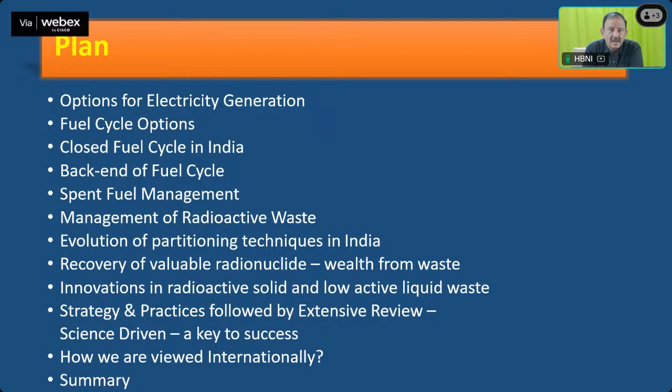I will rush through to give significance to the fact that nowadays global warming has gone beyond the table of a typical scientist. Earlier, for the last 20-30 years, the scientific community worldwide kept working and trying to publish. But now things have gone from the scientific community to policymakers, because there has been a visible change with respect to global warming.

This slide shows per person consumption of electricity. The world average is around 3000 kilowatt hours per unit, and in the Indian context we still have a big gap to cross even to come near the world average. Presently we are at around 1255 kilowatt hours consumption per person in India, and that too is not representative, because there are still almost 205 million people where electricity has yet to reach. Similarly, worldwide, 9% of the world population, amounting to 940 million as per United Nations data, still need to see electricity.

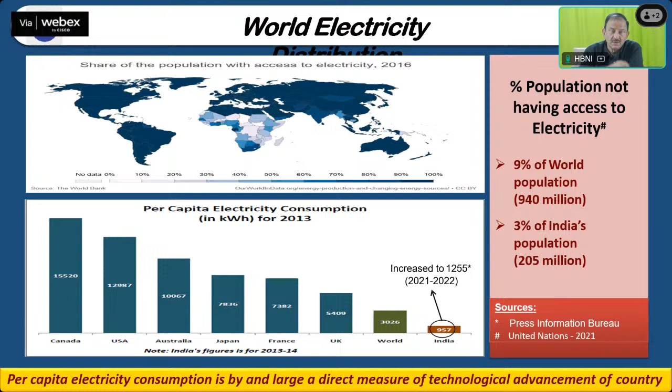World average is around 3000, and advanced countries are touching around 12,000 for US, and even Japan and others around 8,000. So there's a big gap, and this big gap needs to be bridged.

We are all aware that nowadays the government of India is trying to put a lot of effort and focus attention on the renewable part, for the simple reason of trying to reduce carbon signatures. And if you might have seen, in December, our Honorable Prime Minister Modi ji visited what is called COP, the Conference of Parties.

That was the 28th meeting, held in Dubai, where India has reiterated that by 2070 we have to achieve zero carbon signature. That means more stress needs to be given to a process which can meet the demand of electricity without emission of any carbon.

From that point of view, solar has been given good attention, but we are all aware of the limitations of solar. It may not be easy to meet the baseline voltage of the grid. At the same time, a huge amount of toxic waste will be coming, as solar panels need to be replaced more frequently over time, generating a large volume of waste that is chemically toxic.

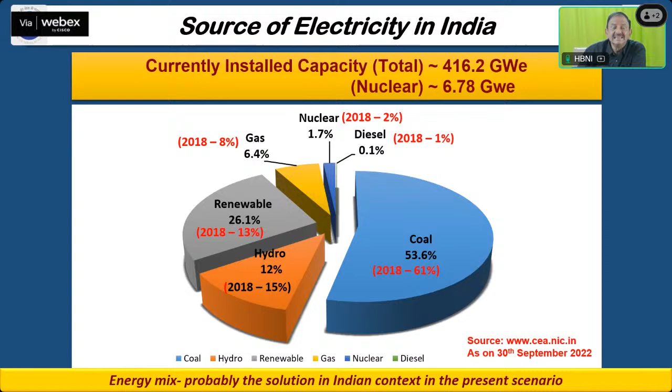It is really very surprising to see that 99% component of the air is not at all contributing anything with respect to global warming.

CO2, we know, whenever IR radiation comes, which is the molecular fraction generating heat - N2 and O2, which are the major fraction of air, do not absorb IR. For IR to be absorbed, there has to be a change in dipole moment. So it is CO2, maybe methane, and then NOx, but it is CO2 which is present in large amount, and it absorbs IR radiation.

This happens while the IR radiation is getting shined to the earth, and even after reflection from earth going back, it is again being absorbed by CO2, which in turn makes the earth warmer, and all of us are aware about the consequences of this.

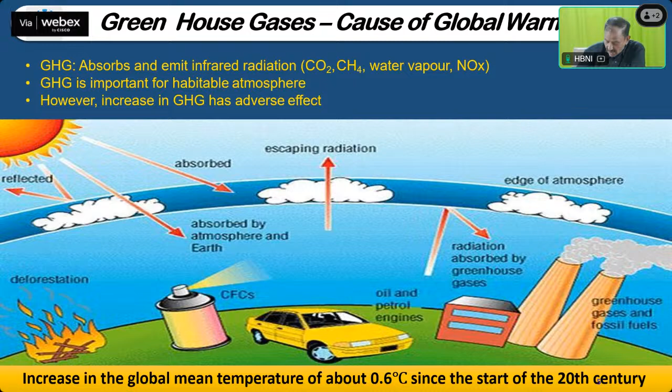So now indications of global warming are more than visible. We have seen abrupt changes in the environment - melting of ice, glaciers and all, increasing the rise of sea level, and eventually paying a heavy price.

So all of us are aware by this time that honest efforts need to be put into meeting the energy demands with respect to having zero carbon emission.

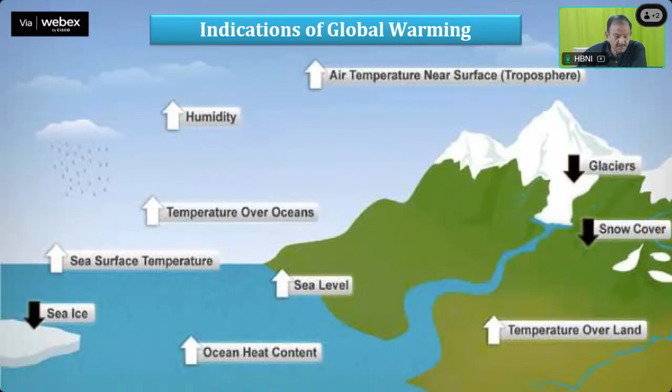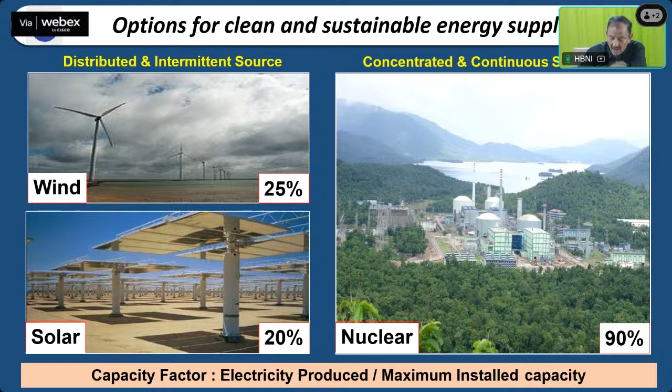If you look at the processes available for renewable - wind is there, but the capacity factor of wind is around 25% only, while nuclear goes as high as 90%.

When we talk about nuclear, just to give an example - even 1 gram of uranium-235, which is our fuel for nuclear technology, is comparable to coal in a typical thermal power plant. 1 gram of fissile uranium-235 is equivalent to almost the energy coming from 2 tons of coal. That means a huge amount of energy reserves are available.

So in nuclear technology, we say we split the atom for societal benefits. Nuclear technology is not only meeting the need for carbon-free, green energy, but at the same time it is offering advantages in almost every sphere of human life, bringing the advantage of science and technology to a common man in terms of health, food, water, national security, and industry. So many applications are there. And really it is unfortunate...

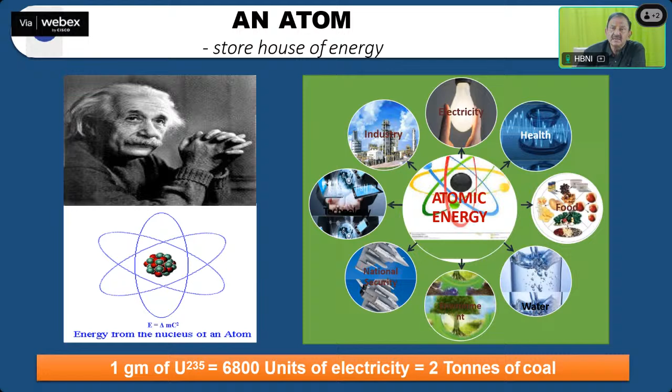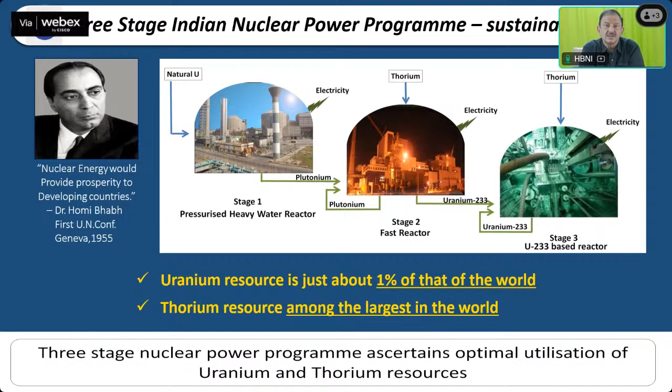If you look at the fission discovery, it was in 1939 when Strassmann and Hahn published the first paper indicating the fission reactions. Not many discoveries in the world have a beginning from a destructive purpose, but this one did, having a destructive application in World War II. All of us are aware of Hiroshima and Nagasaki. The first use, starting from a destructive purpose, had a deeper impact on the individual's mind, and whenever we talk about nuclear technology, our mind inadvertently goes straight to the destructive part. But the reality is different - the atom is getting split up for touching almost every sphere of life.

Now we look at the fuel cycle options. We have 2 types of fuel cycle options. One school of thought goes for what is called the open fuel cycle, where they take uranium as fuel and put it into the reactor. By the time the course is in an advanced stage, you'll know there are 2 competing reactions going on in a typical nuclear reactor.

One is called the nuclear fission reaction, where the fissile atom, particularly uranium-235 in natural uranium, interacts with thermal neutrons, giving a fission product plus a huge amount of energy. That energy converts the coolant and water into high pressure steam, which in turn rotates the turbine of the generator. Nevertheless, uranium-238 is also not sitting idle - it is also interacting, but may not give a fission reaction since the neutron energy is in the thermal range. Instead it's called neutron activation, and because of this we get another very important fissile material called plutonium-239.

This is a very strategic material - not just valuable, there is no price tag available for it - and it is very important as a fissile fuel for future reactors. So there are 2 types: one is called closed fuel cycle and one is open.

A time comes in the reactor when the content of uranium-235 gets reduced as a function of time, and it may not be easy to contain or continue the nuclear fission reaction. We call this spent fuel, something equivalent to the ash in a typical thermal power plant. The countries going for an open fuel cycle say, okay, now this is waste. Actually it will contain fission products, and it will also contain plutonium-239. Just to note, plutonium-239 has a long life of around 24,000 years.

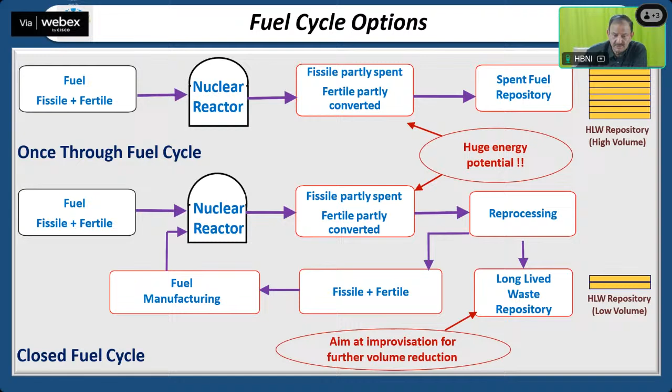Look at the fresh fuel - when we take it, it goes to the reactor, and once it becomes spent fuel, being a closed fuel cycle partner leading the group, we take it to a facility called a reprocessing facility, where we dissolve the spent fuel and then go for a chemistry-driven process called solvent extraction, where we remove uranium and plutonium and then deploy them as fuel for future reactors.

And not only do we stop there, but even the fission products, which were normally once upon a time called waste, we separate them and then deploy them for different applications.

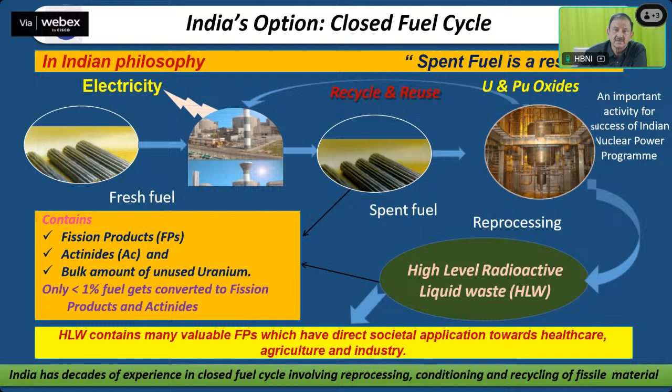So these are the actinides what I'm talking about, americium, neptunium, curium. They're also produced in the reactor during neutron activation, and they are important because either they themselves are long-lived or their decay product is long-lived. The countries who are going for an open fuel cycle, while disposing the waste, the activity content will remain for a time scale which is very, very long in nature, maybe millions of years. But India has gone for separating these actinides and tries to utilize them for strategic as well as different industrial applications.

I'm just coming to the high-level waste, how it is getting generated. In fact, we define the waste typically as low-level waste, intermediate-level waste, and high-level waste. These low, intermediate, and high-level terminologies are coming depending on the concentration of radioactivity, radionuclides. That means the radioactivity which we measure in terms of either Curie or Becquerel, and the half-life of the individual radionuclides. So it is the high-level waste which contains almost more than 99% of the radioactivity getting generated in the entire nuclear fuel cycle.

So I thought let us start with our HLW, that's called high-level waste. I have shown it in red because it needs a complex process. It is heat generating also, because the radionuclides are unstable, they are trying to decay, and while decaying they are emitting radiations. As a result, heat is getting emitted. So even storing needs cooling facilities and all. The red nature shows it needs systematic and careful investigation and a process methodology for its management.

So the fuel is initially chopped, we dissolve it, and again go for chemistry to change the valency, because in solvent extraction, which is typically a chemical engineering driven process, we have to play with the valency of the radionuclides. We convert Pu, that is plutonium, into the +4 stage, uranium into +6, and then we go for solvent extraction using an organic extractant called tributyl phosphate, with normal dodecane as a diluent, and of course the liquid will be HNO3, because we are dissolving the spent fuel in nitric acid.

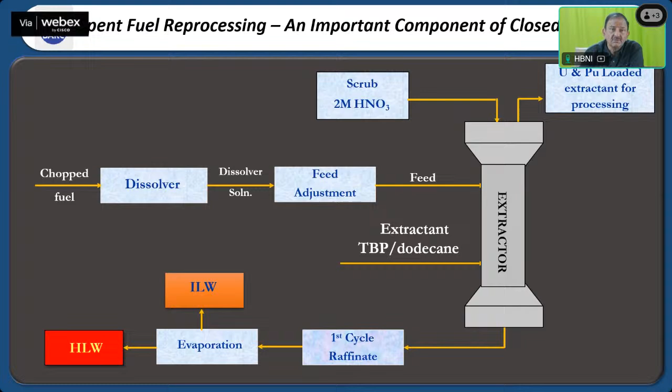I'm sure the audience here may be knowing the difference between linear economy and circular economy. If we have to look for development on a sustainable basis, we have to devise a process which gives us what is called circular economy.

Maybe if we look at the father of the Indian nuclear energy program, I'm sure this slide might have been repeated on a number of occasions, where Dr. Homi Jahangir Bhabha - one important thing I have to add is that the conception or importance given to waste management has been there right from day one. As per him, as per his preachings, we had to have very safe management of radioactive waste, to a standard which other countries can emulate, and India can remain as one of the reference countries in terms of management of radioactive waste.

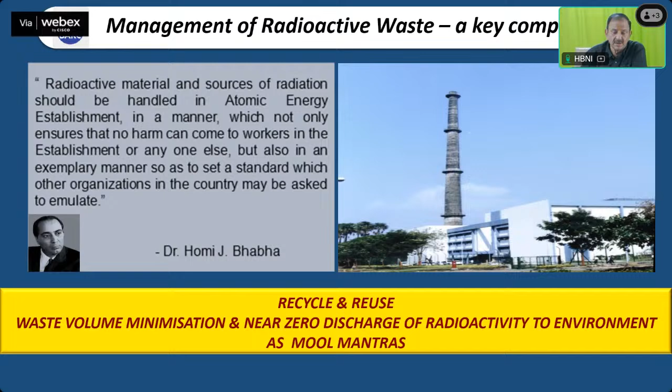Look at the classification. If you look at waste, I'm sure you will not find any process where there is no residue left in addition to the main product. Now this residue - since we were not able to find any immediate use, or it would not be economically viable to convert that product into a useful product, we used to call it waste. So there is no industrial activity where there is no residue or so-called waste possible. To that extent, nuclear industry also is not an exception.

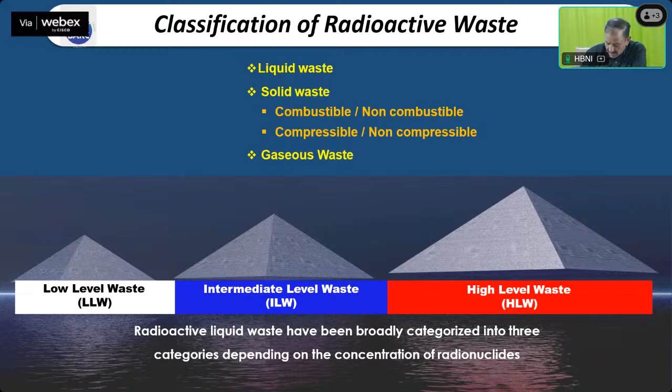Here also we get a small volume of waste, which is sometimes in liquid form also. Solid waste also, we divide into two parts, combustible and non-combustible. And of course gaseous waste also gets generated. Coming to liquid waste, we primarily divide it into three parts, namely low level, intermediate, and high level.

Those pipes are well qualified, and after a lot of review, the cooling facilities and all, the liquid waste comes into the waste management facility, and there the liquid waste is converted into an inert solid matrix. Inert means even if the radionuclides get chemically bonded to such an extent that they become almost chemically inert, they become immobile, even if they come into contact with water, because water is a carrier medium by and large. So even if they come in contact with boiling water, they are not leached out from that solid material, so that they cannot reach the human environment until they decay.

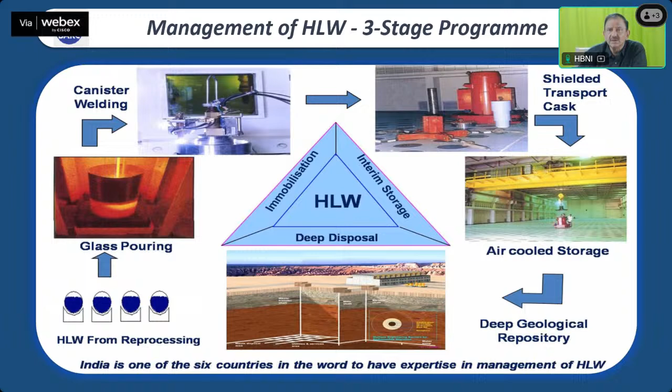In our case, when we are removing all the radionuclides, including fission products, our inventory of the waste is almost nearly zero. Now the question comes, what is so special in glass? Why is glass chosen as a matrix for accommodation?

If you look at glass, we have learned from nature. For example, near Thane in Bombay, we have an area where, according to the Geological Survey of India, maybe 65 million years before, some meteorite and such fell, and in the earth we have silica and other constituents which can form glass. So natural glass was formed there. And like this, there are many such sites in the world.

Those glasses were investigated in detail and it was found that there has not been much loss in the integrity of the constituents in spite of a long length of time.

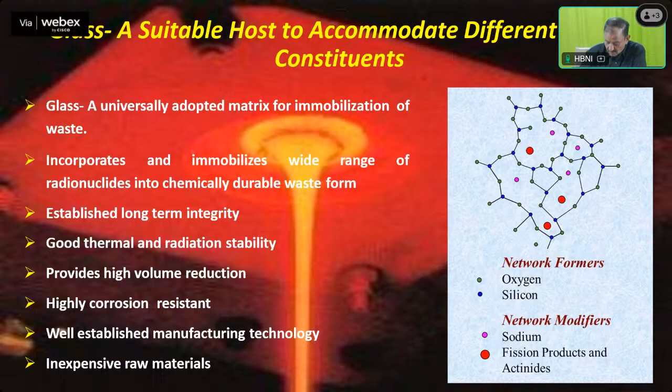Clearly indicating, nature is indicating to a nuclear scientist, look, glass can be a very effective host for retaining nuclides for the length of time scale we are looking for, till they decay to an almost unnoticeable level. Now, if you look at the waste management part, it is a good hybrid of science and technology put together.

We need to have an understanding of separation science, because we are separating. That means we need to understand the minute differences and then try to explore those differences as a technology for quantitative removal of radionuclides if we had to deploy them for any societal benefits. Material science is very important, and so is nuclear chemistry.

Similarly, on the technology side, robotics is very important, because any maintenance needs to be done inside the hot cell. A lot of material handling is required. The canister has to be taken out, and it has to be remotely welded. So all these things need to be done through remote handling systems.

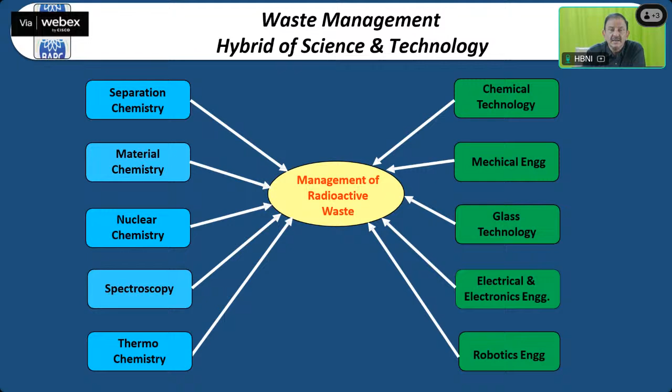And glass technology - many of you may know glass appears as a solid, but it is not; it's an amorphous material. Nowadays even 30-40% of our glass products are being used in construction. And even 5G, 4G, and internet technologies, fiber optics is nothing but again a gift given by glass technology.

This is a typical process flow sheet where we do extensive job hazard analysis, or hazardous operation analysis. We go and check what worst-case scenario may happen - even the smallest thing, that all this is done in a hot cell, and let's suppose the class 4 supply has gone. When I say class 4 supply, I mean the normal power supply, let's say it has gone.

And the hot cell is normally kept at a little negative pressure compared to outside, so that even by diffusion, radionuclides do not escape. So in case the class 4 supply goes, then the DG set needs to come in.

But even if the DG set takes maybe 4-5 seconds, and if for some reason the DG set doesn't come on, then what to do? So we take these worst-case scenarios and then put in all our interlocks so that we can avoid any mal-operations.

You know what typically happened in Fukushima because of the tsunami - the class 4 supply had already gone because of the earthquake. But even the DG set - the water layer coming from the sea was so high that it buggered up the system of even our DG sets. As a result, cooling could not be given, and this resulted in the water getting converted to steam, high pressure steam.

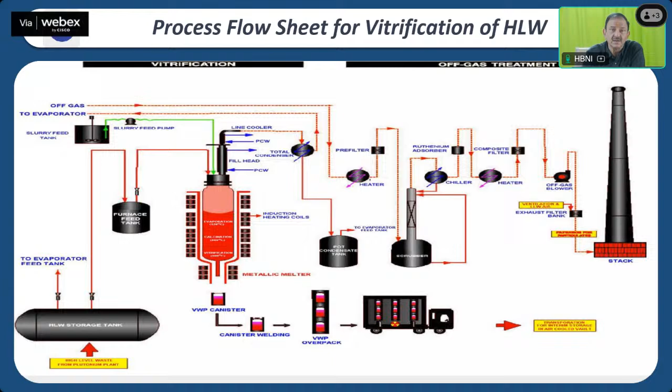Look at the waste we contain - it has a lot of inactive chemicals, because those chemicals are added during the reprocessing stage. Like I was telling you, we play with the valency, and for valency change you have to add some chemicals. So those chemicals increase the load of inactive waste.

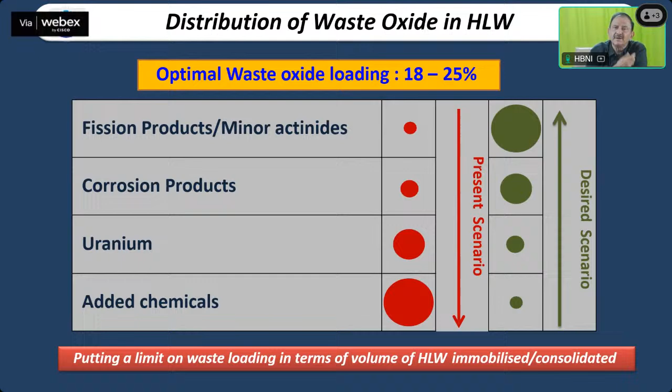Inactive waste management has a different process altogether. So the change we made in the last decade is that we started removing the inactive waste part, which is almost 80-90% of the component, and kept removing the small radioactive part separately. This process has really helped us from many angles.

One angle - look at the fate of countries going for an open fuel cycle, which will contain plutonium, uranium, and so on. The upper line, the yellow line, shows that if you don't remove anything, it will take almost more than 100,000 years for the activity to come down to a natural uranium level. The red line shows the natural uranium level existing in nature, with which human civilization has been coexisting. So if you don't remove anything, even if disposed at a depth of 500 meters as conceived, it will still take more than 100,000 years to decay to a level equivalent to natural uranium.

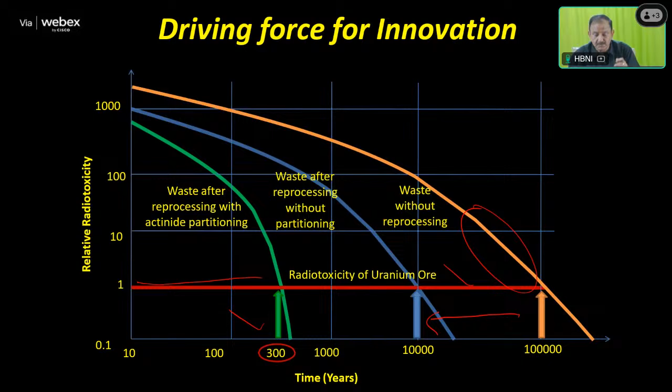In the closed fuel cycle, if we remove uranium and plutonium, the time gets reduced to almost 10,000 years or even less. And if you also remove the minor actinides, it comes down to less than 300 years. So removal of this part also helps immensely in reducing the toxicity or burden. Look at the reduction in long-term radiotoxicity - the remainder is amenable for transmutation.

Transmutation means we can again use high neutron energy to force fission at that time. Look at the upper side - this plant is a facility located at Tarapur, where we have developed the process for removing actinides, which are long-lived materials. This plant is the first of its kind in the world, where engineering-scale separation of Americium-241 is done.

I don't know if many of you are aware, but for Chandrayaan-3, this Americium-241 was used as a heat source - it's an alpha material. It was given to ISRO because it keeps the semiconducting devices warm. Those who are aware know that if the temperature goes into minus, semiconducting device performance drops, and that virtually decides the usable life of a typical satellite. So this Americium-241 was given by DAE - I'm sure you must have seen statements from our chairman and ISRO confirming it was given by BARC.

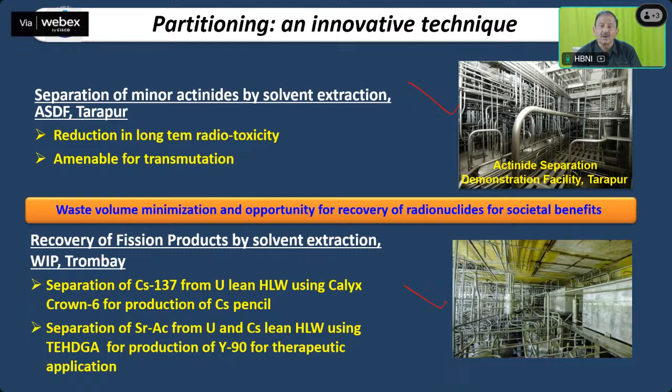The second part, the fission products like Cesium-137 - this process was also developed at BARC. We removed these fission products and utilized them for different applications. And look - while removing everything, the waste becomes nearly zero compared to what remains in an open fuel cycle.

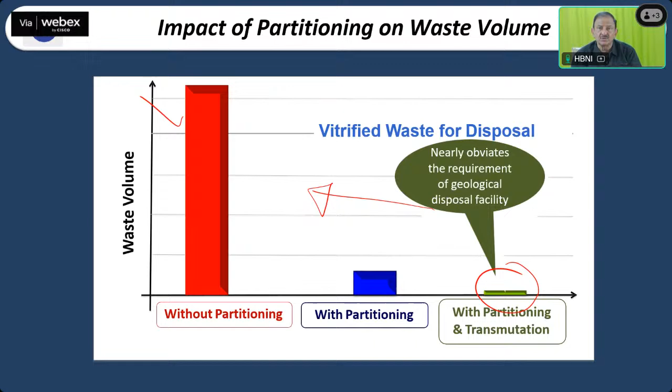So this innovation also helps a lot to minimize the volume of waste generated, which comes to nearly zero. And secondly, whatever we have removed has market value - take Cesium-137, take Strontium-90. These are not just concepts.

Almost lakhs of curies of Cesium-137 have been removed, put into a non-dispersible glass form, and are now being used as blood irradiators. You may be wondering why blood needs to be irradiated - for an immunodeficient patient, if blood has to be transfused, it must first be irradiated to destroy harmful bacteria and other pathogens, because the patient's immunity is nearly zero.

For blood irradiation, earlier cobalt-60 was used, which has a half-life of 5 years. Making cobalt-60 requires a reactor. Here it is coming as waste and we are removing it, so waste is becoming wealth.

Similarly, strontium-90 is used for therapeutic applications. Every week we give strontium-90 to Tata Memorial Hospital for cancer patients. Americium-241, as mentioned, is used for space applications, and this isn't just conceptual - it has already seen the light of day when it was given for Chandrayaan-3. Ruthenium-106 is one of the very recent breakthroughs, maybe 3 to 4 years old, where we separated it from waste, electro-deposited it on a silver plate, and this silver plate was then used for eye cancer treatment.

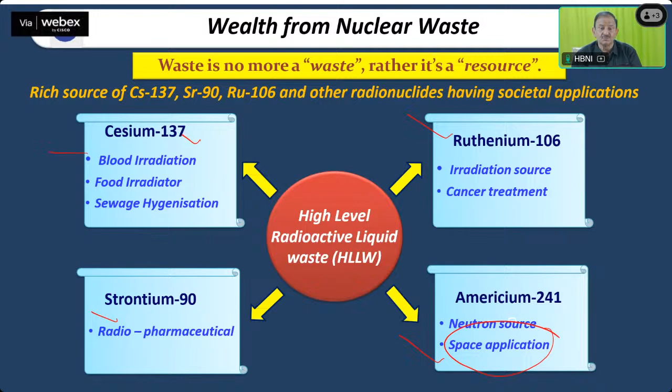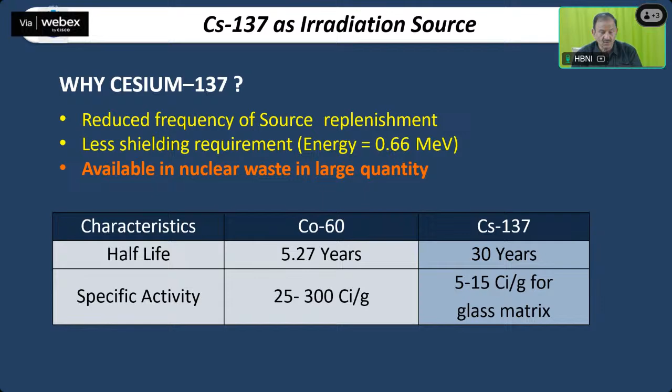The question comes, why cesium-137? As I mentioned, it has a much longer half-life compared to cobalt-60, and it comes from waste. After removing cesium-137 from waste, it's converted into a glass product that is non-dispersible. In hospitals, we don't have a high level of security, so if tomorrow a terrorist comes and removes it and puts it into water, that's a risk. But here it was converted into glass. Even if it comes into the wrong hands, the cesium-137 cannot be released because it has become a permanent part of the glass structure, providing nuclear safety and security while being used at hospitals.

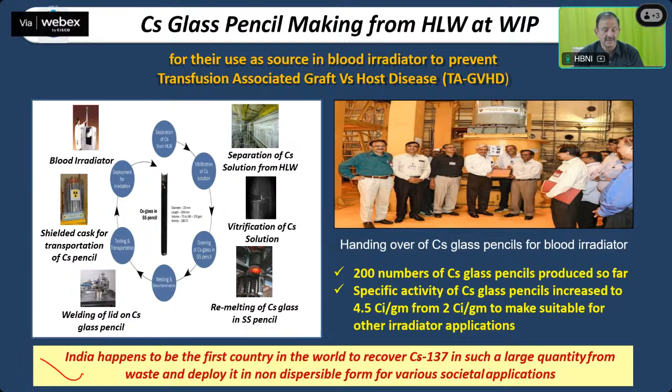Our country was the first in the world to do this, and it's not just a matter of publishing a paper - this is at plant scale, where lakhs of curies of cesium-137 are removed and converted into non-dispersible glass. More than 20 to 25 hospitals in the country are using this cesium-137 as a blood irradiator. This ruthenium-106 is being used for eye cancer treatment.

You'll be surprised, there was only one country in the world doing this, Germany, with a company called BEBIG Germany. You can see on Google, they were providing this to almost the rest of the world at a very, very high cost - in the Indian context, it was costing around 12 to 15 lakhs per plaque. This plaque has a diameter almost as small as the eye's diameter, where we put ruthenium-106 by electrodepositing it on a silver plate. So this was costing almost 12 lakh rupees.

The treatment was almost out of reach of a common man. At BARC, we developed it and gave it initially to AIIMS Delhi - initially any change is scrutinized. So we gave it there, and I also went to AIIMS and gave a lecture to them. Initially we supplied it free of cost, and now for the last 3-4 years they have stopped all their imports - even Sankara Nethralaya and other leading hospitals. Probably more than 500 patients have now got the advantage of this indigenous technology at a very affordable cost - almost 50,000 rupees compared to the 15 lakhs they were paying to import from other countries.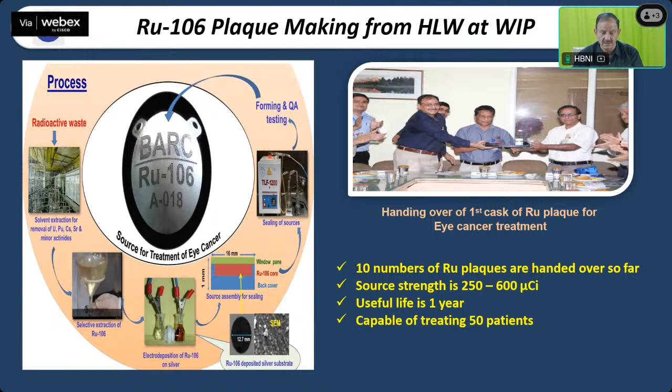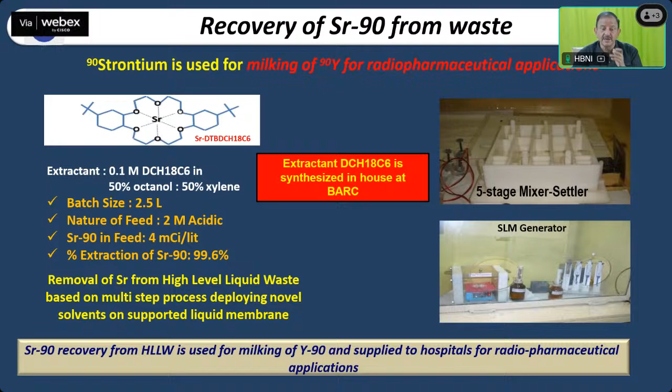Similarly, we are recovering strontium-90 for different hospitals, working on what is called develop, demonstrate and deploy. This is the facility for interim storage of the glass product, where distribution of heat occurs and a convection-based cooling system is available. This facility operates at Tarapur and in the southern part at Kalpakkam.

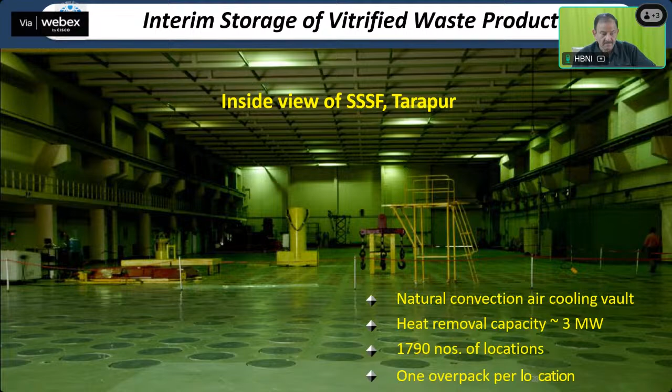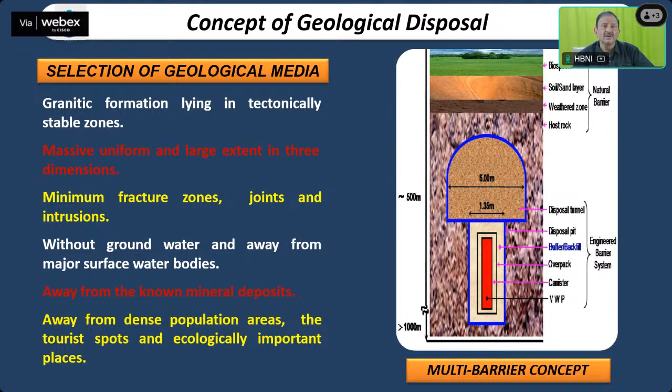This is a typical conceptual disposal approach - although India isn't doing this, countries with an open fuel cycle have to dispose waste deep, around 500 meters below ground. India is also doing R&D here, but our waste volumes are low because our technology now follows what is called circular economy, where we hardly have any volume of waste for such disposal. Intermediate level waste activity is also low - we use ion exchange, and we work even for low level waste where concentration is too low, aiming for what is called near zero discharge, rather zero discharge - a waste to water approach.

After the waste treatment, whatever liquid comes out is being checked, and even the activity level comes below what water can be drinked. By WHO limits, the activity comes much below the permissible limit of potable water. So we follow a waste-to-water approach, working on zero discharge to the environment through our chemical treatment.

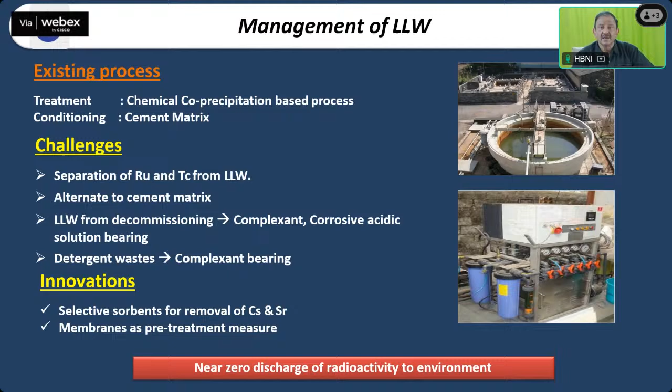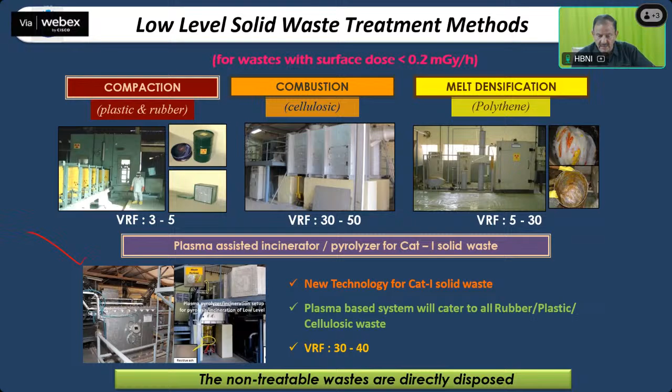Again, it's a hybrid process. We go for chemical treatment, ion exchange, reverse osmosis, and other advanced processes as well. For low level solid waste, we go for volume reduction by plasma incinerators. This is recently developed at BARC, where the waste volume is reduced to a small value and then it is pyrolyzed.

When we think about the technology developed by Indian nuclear scientists, is it not possible to look for even non-nuclear solutions? A typical example is the management of municipal solid waste.

This is a photograph of Gazipur, Delhi, where the height of this municipal solid waste is almost not far away from Qutub Minar. Presently, landfill and open incineration is the process being adopted, which is not the best, because this polymeric waste, when incinerated by normal conventional means, releases poisonous and highly toxic gases like dioxins and furans, which have very, very small threshold limit values.

So these are not the way forward. An advanced process is now being done by BARC at a capacity of 50 kg per hour. Once completed, this may act as a model plant for all the states, and the time will come when this process will be deployed in almost all the states.

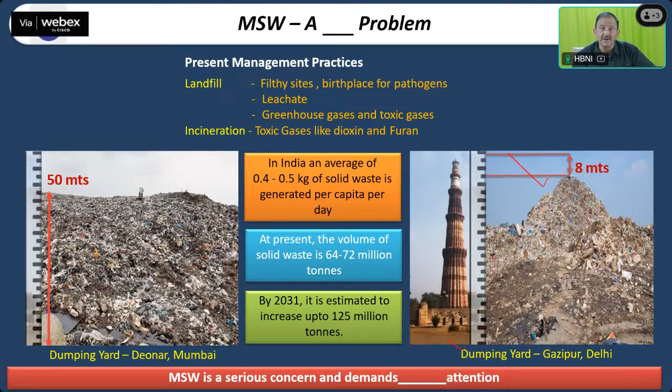Even all these non-degradable polythenes and such, ultimately they're all carbon-hydrogen polymers. If you heat them, they're all exothermic, meaning energy comes out from there. So that energy is also being utilized by our plasma process, and this energy is used to convert water into steam, and that steam can also be utilized. So this is also part of our circular economy.

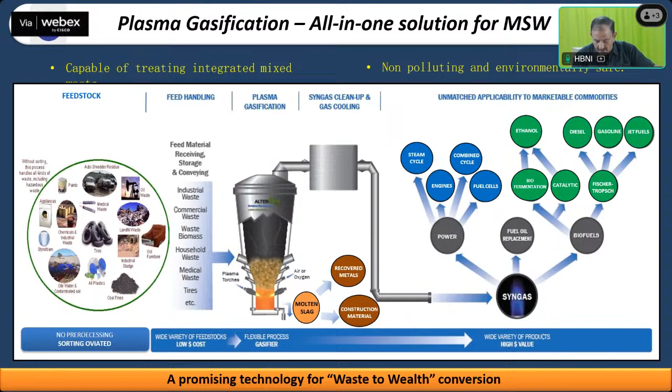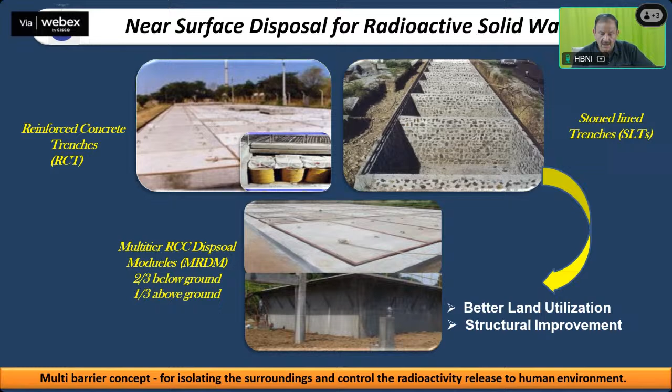This is a small volume of waste which helps with disposal, and there are low half-lives where the waste, within a period of some 30-40 years, actually comes to an innocuous level.

I was telling about the policy strategy, and how to make sure it is a fail-safe process. These are all science-driven processes. Based on a lot of experiments, we follow the acts and rules, such as the Atomic Energy Act and Atomic Energy Rules 1987. These are all independent safety reviews.

At the same time, these policies and strategies have all come to an acid test by having a job hazard analysis for each component, and then preparation of regulatory documents, taking approval at multi-tier based independent review and multi-tier based safety approvals. We do come across some sort of deviation from this.

For example, in case of a failure of the class 4 supply, and the activity-if the DG sets comes, it takes time, then there will be diffusion from the cell to outside, and at that time, online health physics instruments are in place. They'll find, okay, now activity level is rising. We call it DAC, that is Derived Air Concentration, and at more than some 10 DAC, they'll say, okay, now this is called an emergency situation where the operators who are working can go out, and then things can be resumed once our DG sets and all come back to operation.

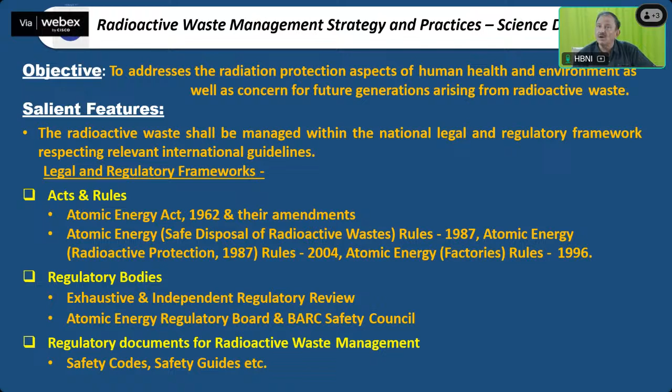What I'm trying to say is there has been a systematic approach to deal with these situations, and they're all being discussed and deliberated in the regulatory committees, which are independent. They are not part of operations. So again, we follow the process closely.

Coming to the conclusion part, our policies and strategies have been developed over a period of time based on science and technology. We also do hazard analysis so that we can avoid any undue call for operational consequences in case it comes, because all processes have initially been done on the laboratory scale, and then we test one-to-one before the plant is made hot.

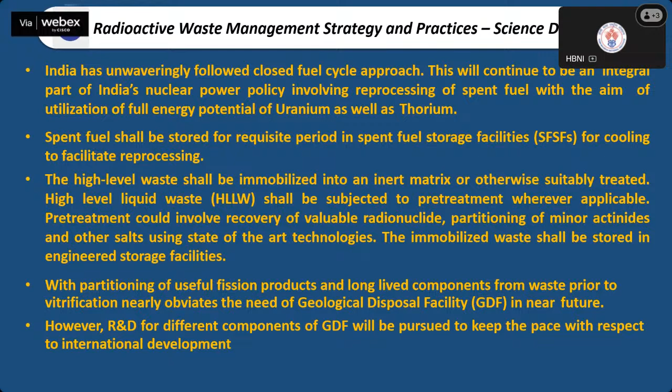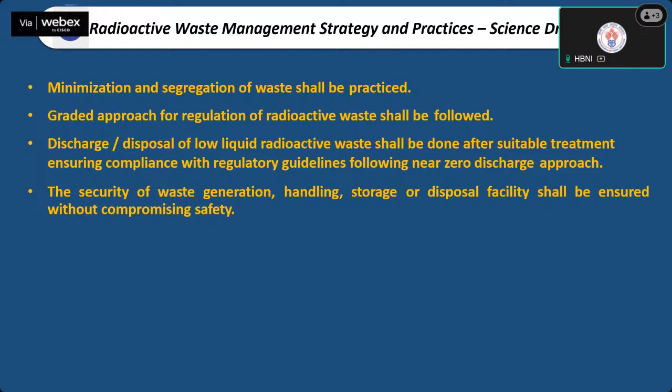Similarly, we practice minimization and segregation of waste. We have a graded approach for regulation of radioactive waste to be followed, including discharge and disposal of low liquid waste. We do this with a zero discharge approach, and see how we are now viewed internationally.

This last decade has really taken the international community by surprise. When they came, they were telling us, 'we need your help,' because we have made waste into wealth. This was not being practiced earlier, and in several aspects we were first in the world.

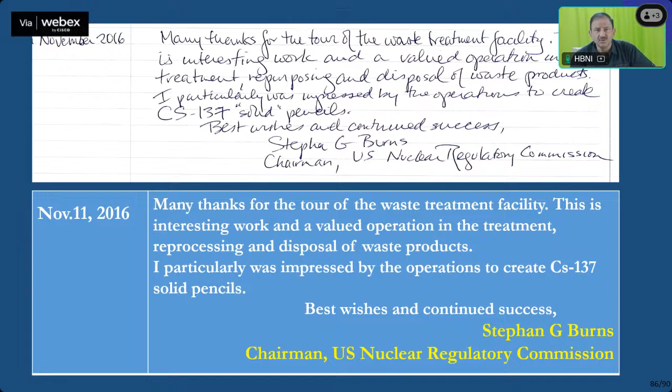Similarly with USNRC, they were telling it is impressive to see Cesium-137 recovered from waste and made into a sellable product, which will really affect the overall economics of nuclear science and technology, leading to a circular economy.

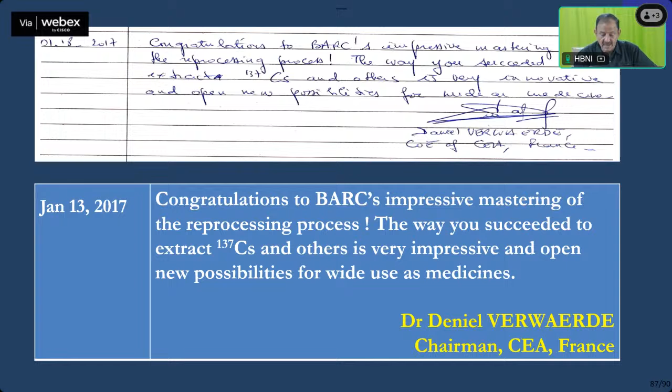Similarly, we have CEA France, which is a big player in nuclear science and technology. When they came, they were also quite impressed with this, and they were looking at how it can be used for medicines. They were highly impressed with this.

And in Japan, they told us, 'we need your help.' Look at how things have dramatically changed in just the last decade. Now the Indian scientific community is almost sitting in the driver's seat for this complex technology.

To recap what we were discussing, we have enriching experience in the regulatory part, and these regulations come from vast experience in science and technology. We have gone for a closed fuel cycle where we reprocess, because we found reprocessing is optimal for utilization of our resources, and now we have converted waste into wealth.

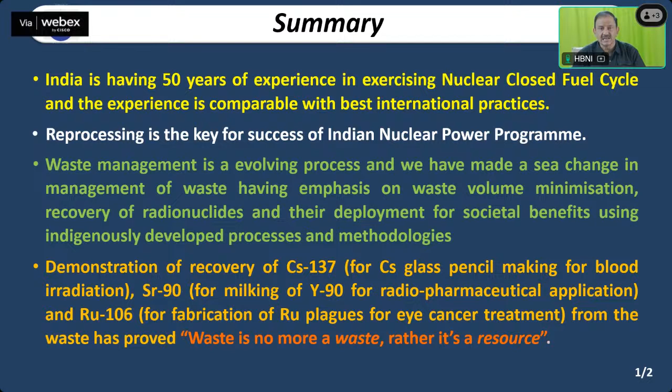In fact, the other day the chairman of our Atomic Energy Commission was telling us that the name of the division should be changed to a wealth management division. On the lighter side, each component of waste is being separated and now converted into a product.

So India is having a successful beginning in partitioning. As I told you, Americium-241 is removed from waste and being used. One example was our space technology.

Safety is a prime concern. The best track record with respect to safety is the result of adoption of safe practices along with continuous, exhaustive, and independent regulatory review. That is the main crux of how we are able to achieve an excellent safety track record.

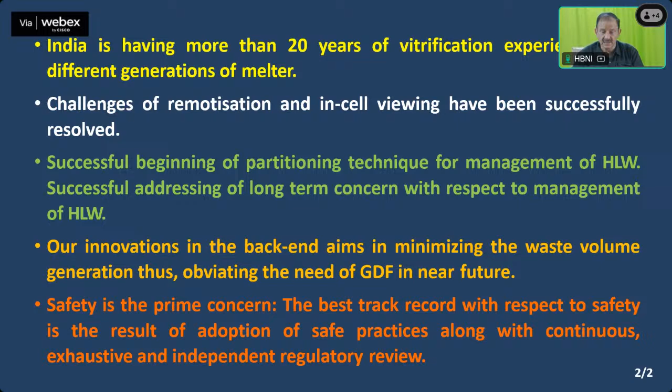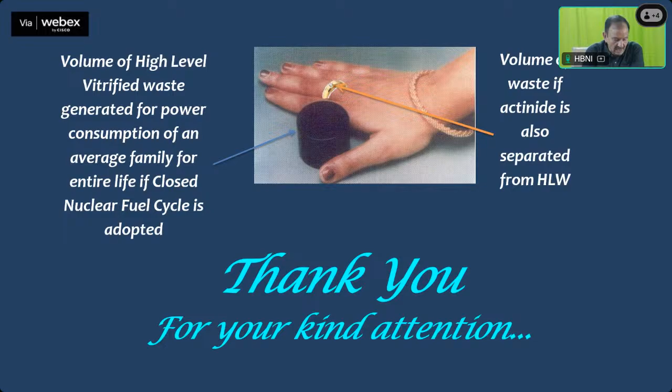And as our Honorable Prime Minister has promised, by 2070 we will go for zero carbon. I'm very sure nuclear technology is going to play a very important role in developing the nation on a sustainable basis. With this, thank you very much for your patient listening, and it will be my pleasure if there are questions.